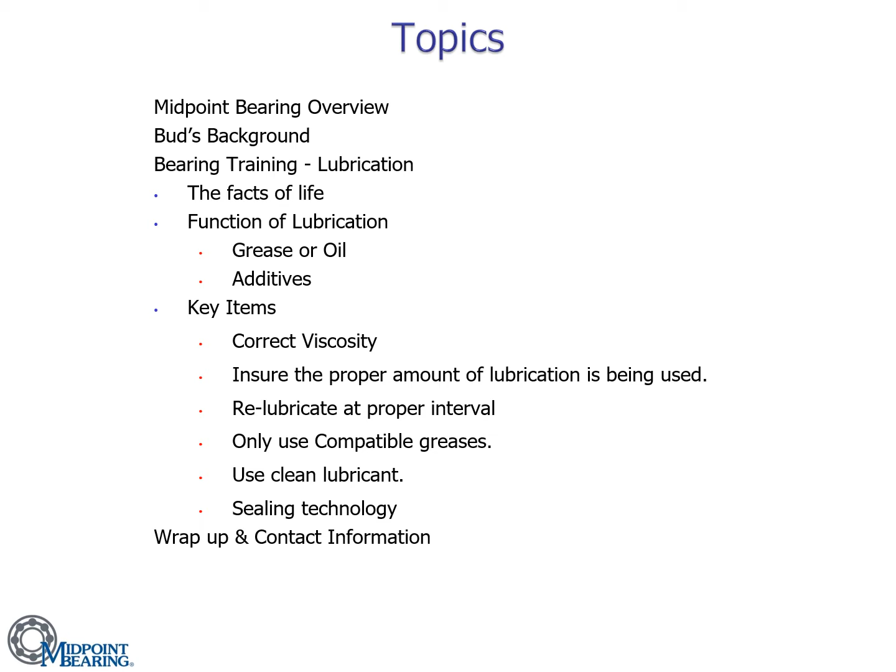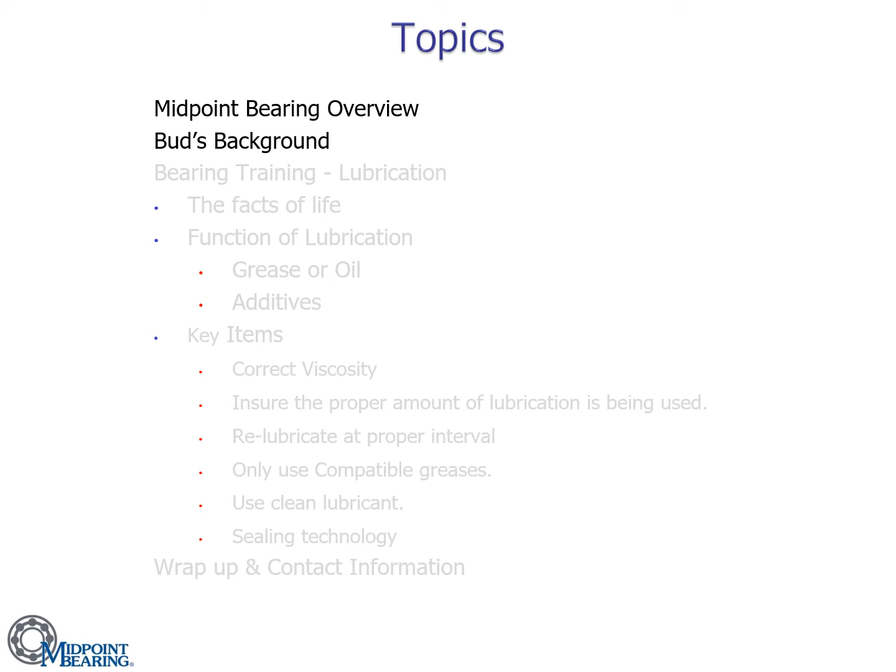So let's start with our Midpoint Bearing overview and Bud's background. Midpoint Bearing was established in 1985.

We are a distributor of bearings and power transmission products. We have 4 warehouse locations: California, Texas, Oklahoma, and Indiana. California is where our corporate headquarters is located.

Midpoint Bearing specializes in 4 major industries: wind turbine repair, electric motor repair industry, steel mill equipment, and the pump repair industry.

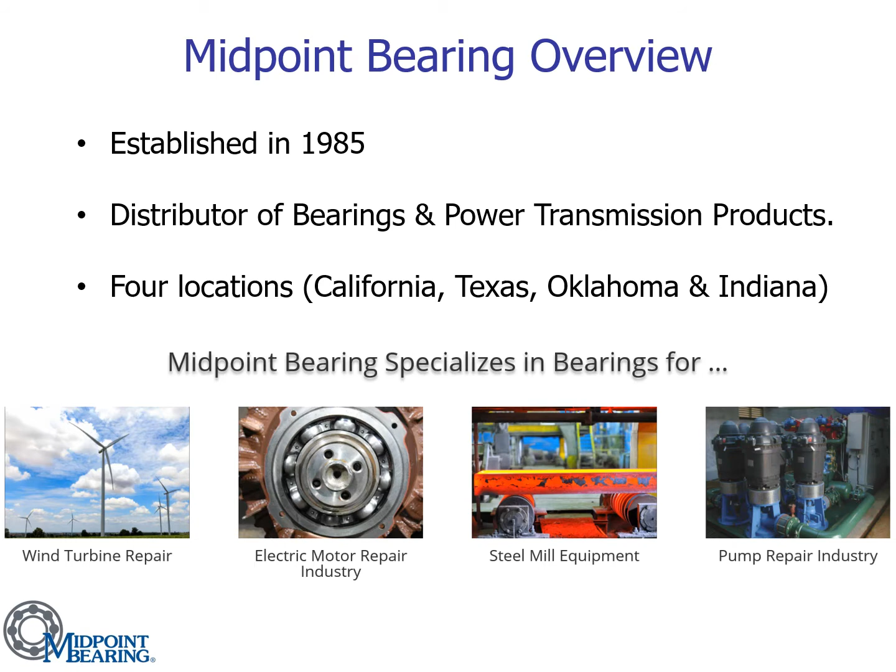Midpoint Bearing is a factory authorized distributor for many fine products, including SKF, Koyo, NTN, Schaeffler, Nachi, Timken, CR Seal, Aegis, Benchmark Thermal, and many more.

A little bit on my background. My name is Bud. When you have a name like William Charles Frable the Third, you want to go by something nice and short like Bud.

I'm from a small town called Napoleon, Ohio. I served for 5 years active duty in the U.S. Army. Then I became a steel rule die builder, did that for approximately 7 years. During the end of that time, I started schooling and finished my mechanical engineering degree from Cleveland State University. 13 years at Koyo Bearing in the engineering department, and in 2012 I was given the opportunity to work for Midpoint Bearing.

Our next topic is the beginning of our bearing training on lubrication, and the first section I titled The Facts of Life.

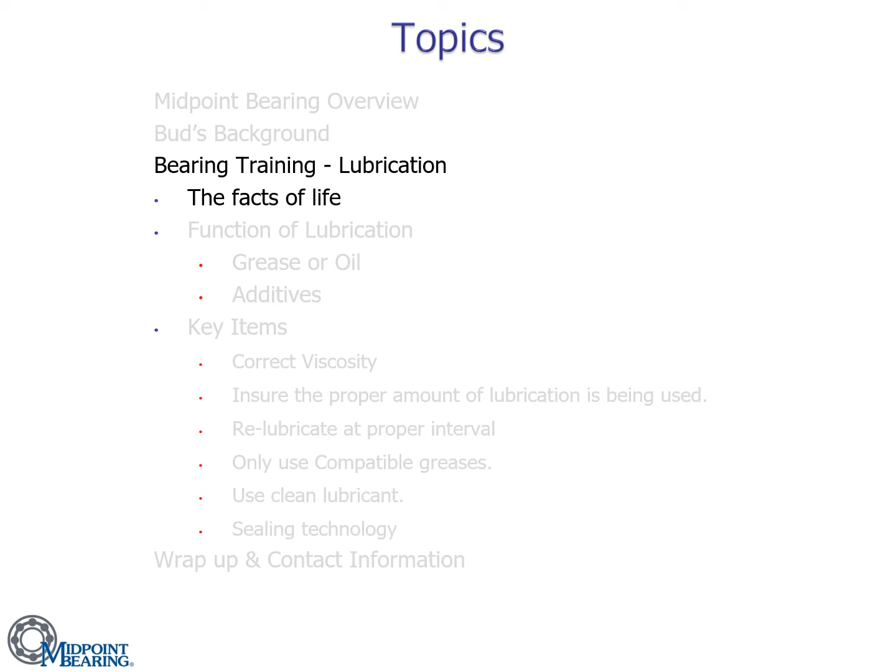Bearing lubrication. I'm going to start with the facts of life. Many times I've heard these questions: how long should a bearing last? That's a pretty loaded question, because how long a bearing should last is truly defined by its speed, its loads, and there's a lot of factors that go into how long a bearing should last.

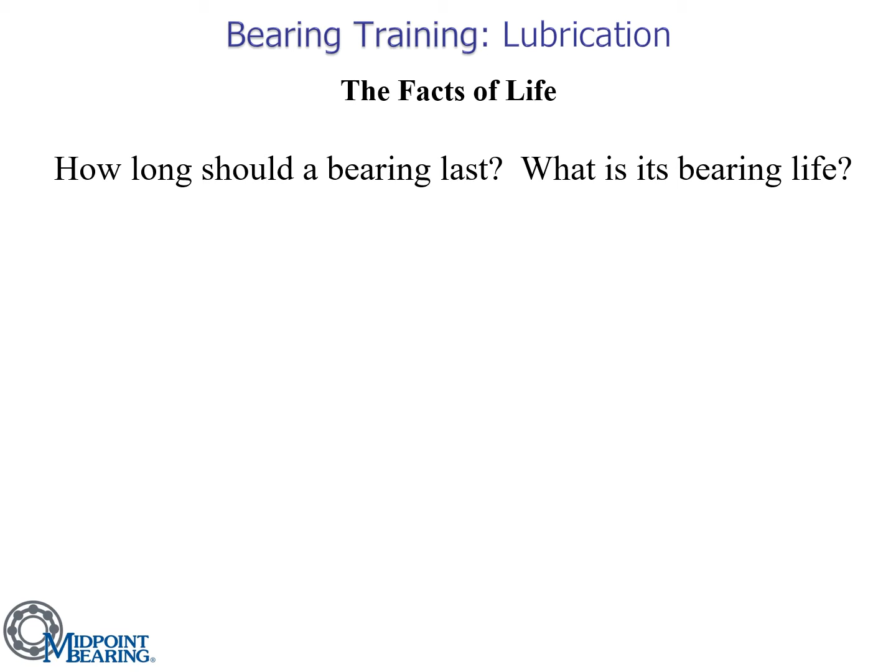And then you hear, well, what is bearing life? The expected bearing life is normally calculated by an equation called the L10 equation. It is virtually impossible to predict fatigue. So what they did years ago is they did a statistical variation of individual bearing lives. What that means is they studied hundreds, maybe thousands of bearings in the exact same scenario, and looked at their failure rates and used that to come up with this equation to best predict this fatigue.

Now, the issue with any statistical variation is that you always have a failure rate, and that's what our 10 stands for. So L10, that 10 is defining a failure rate of 10%. So 90% of bearings will achieve this number before fatigue failure.

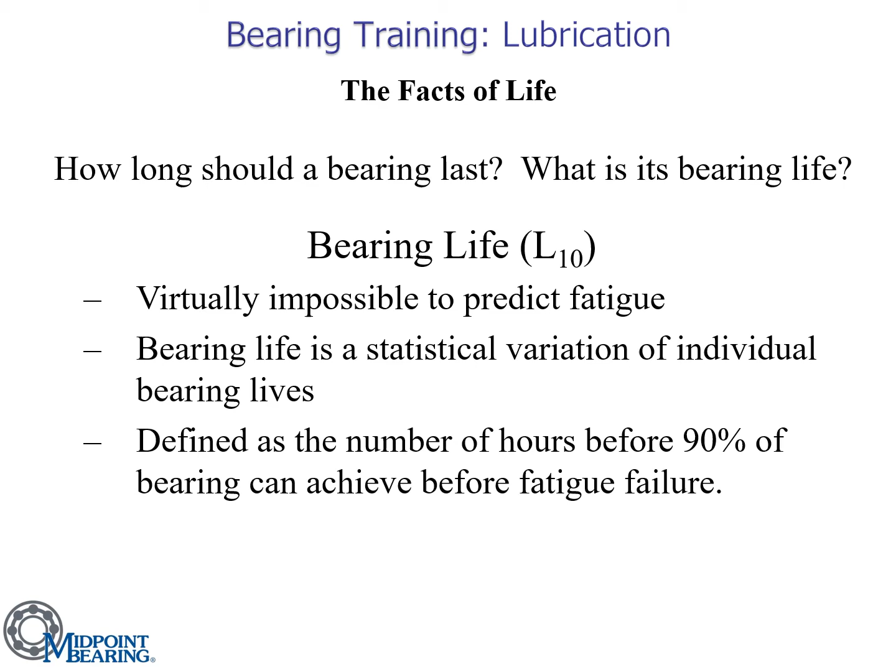Continuing on the facts of life, here is the standard L10 equation. To calculate your bearing L10 life, you have a constant of 10 to the 6th, a constant of 60 times N, which is your rotational speed, times C, which is your basic dynamic load rating, over P, which is your dynamic equivalent load rating, raised to the power of little p, which is 3 for ball bearings or 10/3 for roller bearings.

To calculate this P, you need this combined load equation, which is basically looking at, based on the application, how much of your radial and how much of your axial load will apply to your bearing life. And that creates your P, which goes there. And then when you have multiple bearings in a system, you use this equation here that combines all your different life calculations together to calculate a system life.

Now, notice anything interesting about all these different life equations? Do you see lubrication anywhere? I bet you don't. Lubrication is kind of important, and that's why we're in this training today.

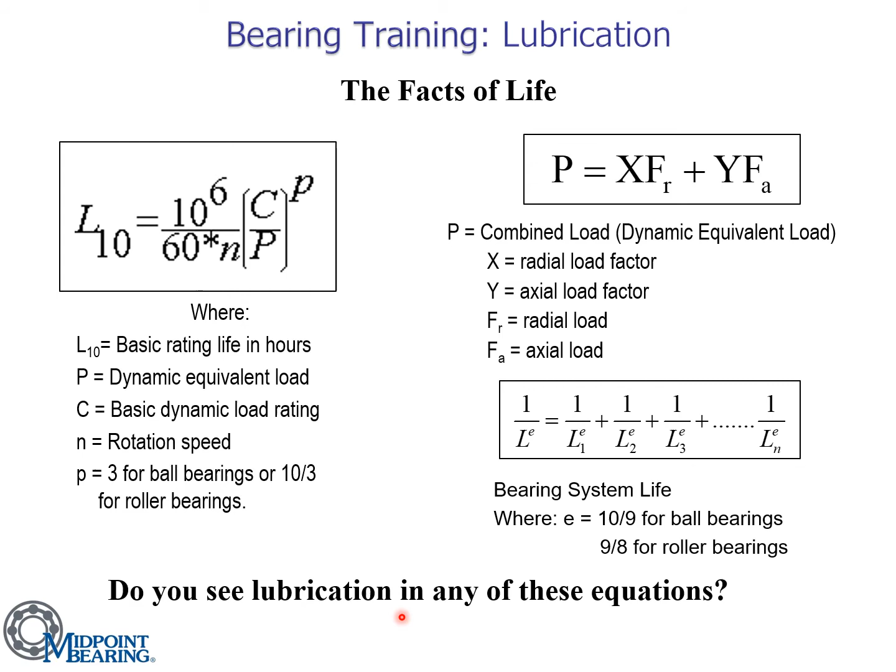The thing that is difficult in the aftermarket is a lot of this deeper information that is required is not available.

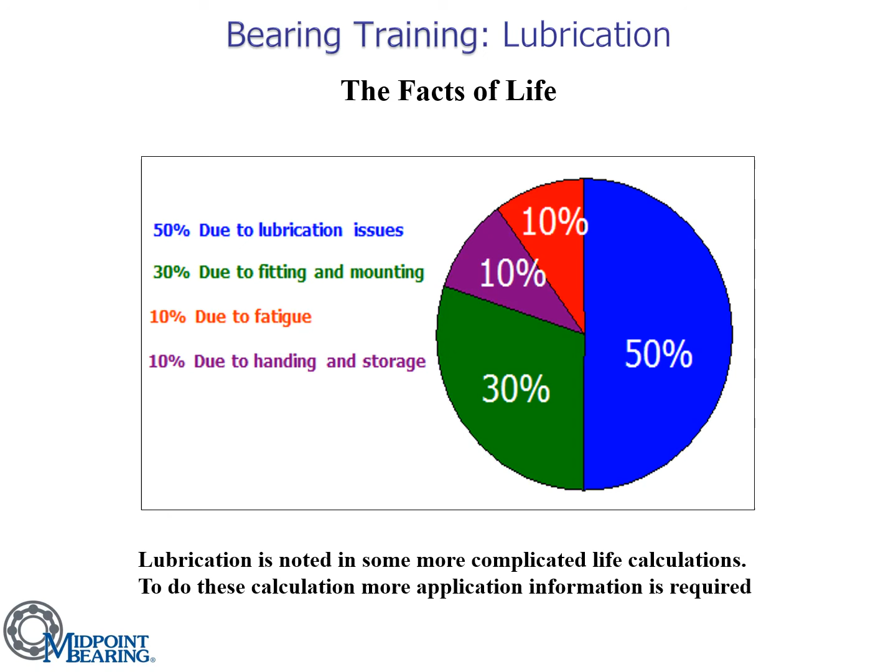Our next section we'll discuss is functions of lubrication. Within this section, I discuss grease or oil, and I also discuss additives.

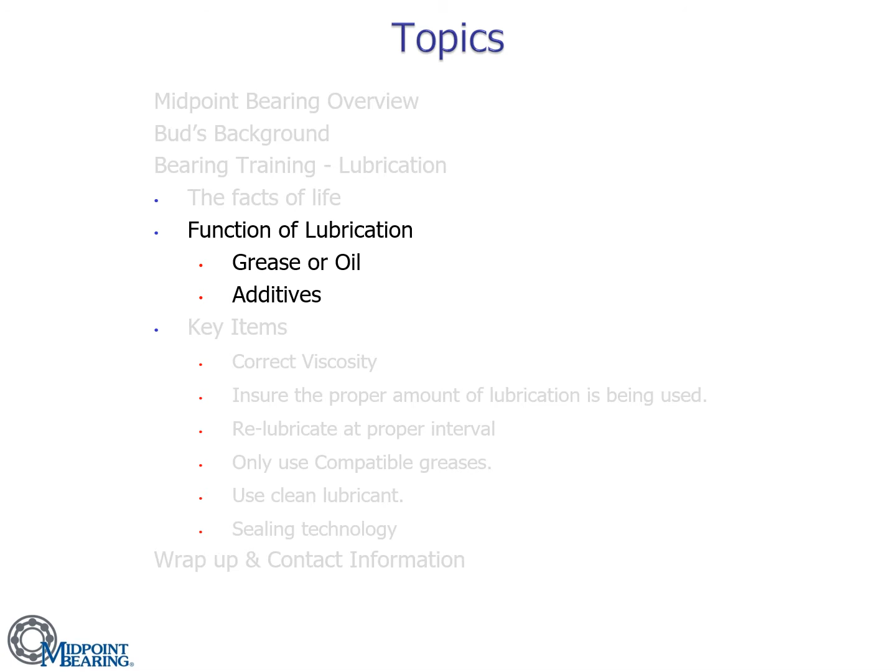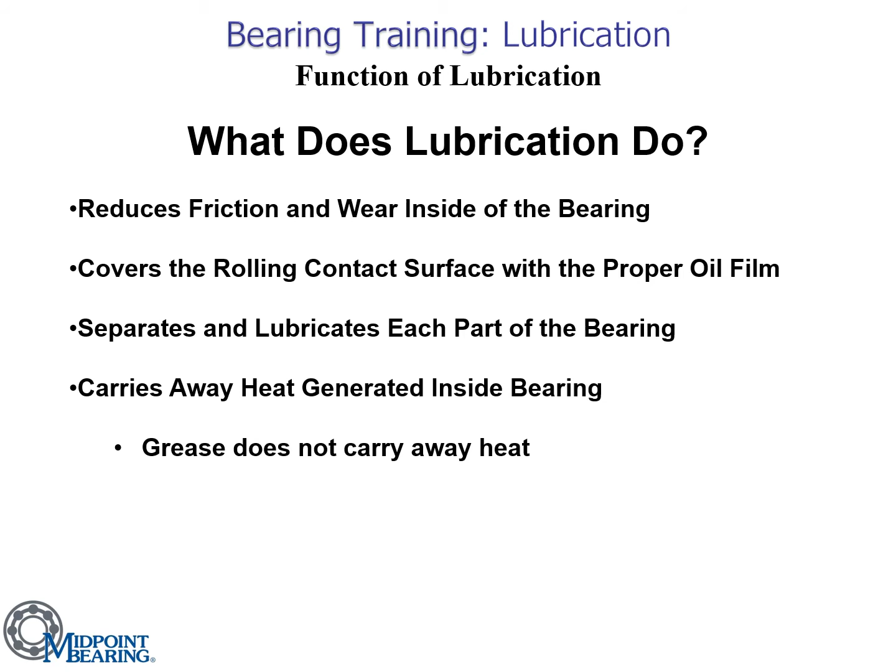What does lubrication do? Lubrication reduces the friction and wear inside the bearing. It covers the rolling contact surfaces, that's the rolling element and the raceway surfaces, with the proper oil film. It separates and lubricates each part of the bearing. It carries away heat generated inside the bearing. Important note: grease stabilizes heat, oil can remove it. The carry away part is only done with oil. It also prevents corrosion and contamination.

This is not a new idea. It's been around for a long time. The picture we see below is estimated to be from around 2000 BC. It is thought to be the first record of rolling motion, found on some palace wall I won't try to pronounce. But what we see here is a large rock being moved across the ground, with rollers being thrown underneath it to help it roll and reduce sliding friction. Now, I may be right or wrong, but these guys here look like they're carrying a jug, which could be oil or grease, that they could be using to soak the rollers or the ground in front to help reduce friction as they try to move this big rock.

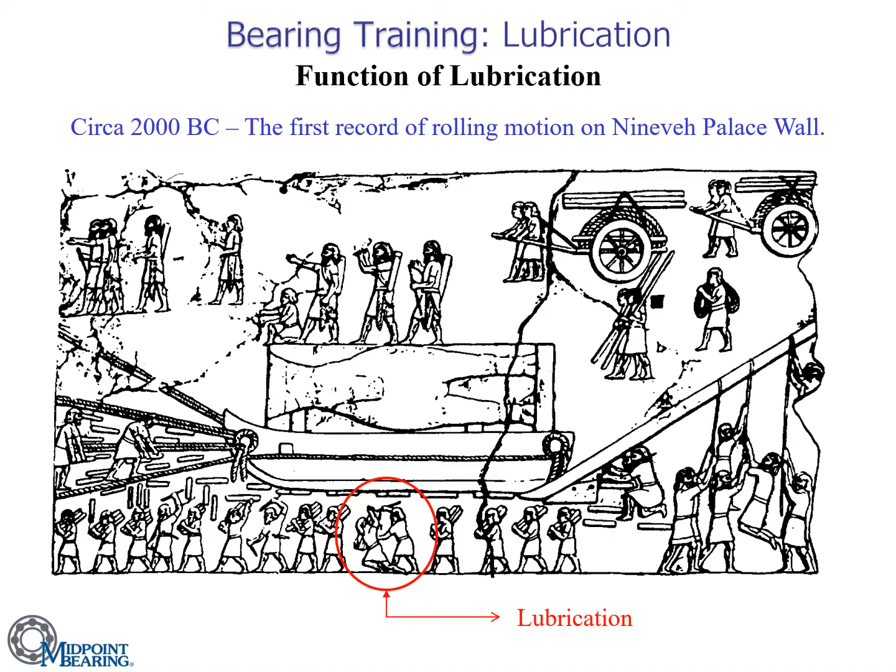Many times I get the question, what is better, grease or oil? It really depends on your application and what capabilities you have within that application. On this slide, I like to highlight 7 different items that can be looked at and split up as good or bad. If you graded them, sealing device shows grease is easy and oil is complicated. All the rest, lubrication ability, rotational speed, replacement of lubrication, life of the lubricant, cooling effect, and filtration of dirt, the oil seems to win. So you'd think, why don't we use oil all the time? The reason is mainly this top one: sealing the lubricant is the most difficult aspect. If you can't seal that oil, if you can't keep it cool without a circulatory system, grease becomes the easy option and wins out.

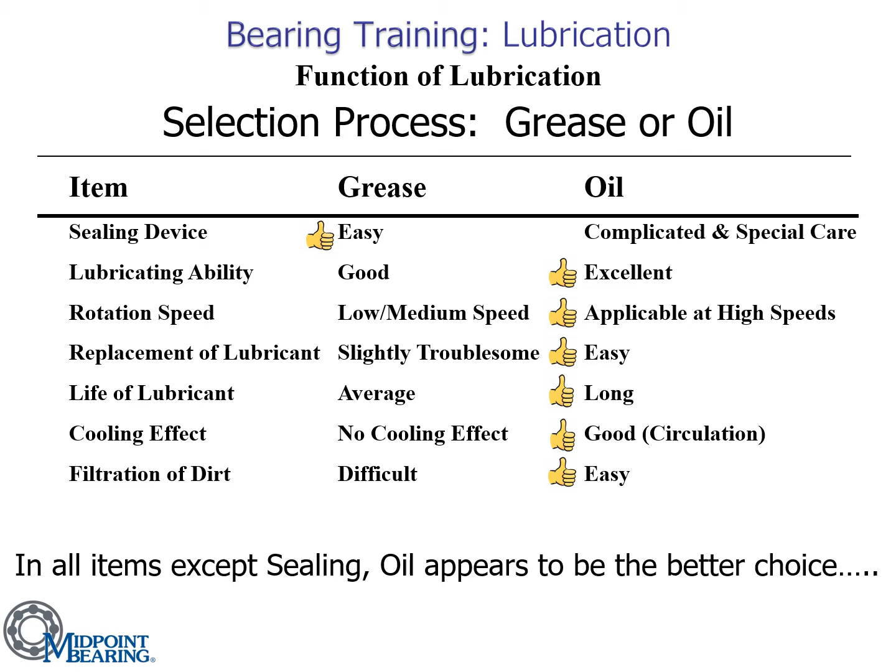This slide might be a little redundant compared to the previous one, but it breaks down oil lubrication in more depth instead of grease. The first bullet says it's usable at high speeds, because grease has a thickener and is a thicker lubrication. At high speeds, grease may get flung out of the bearing or away from the rolling elements and raceway. Oil is also usable at high temperatures, because you can circulate oil and control its temperature using some form of chilling system. You can control the amount better in an oil system, which allows you to reduce bearing vibration. The next comment I thought was kind of silly, but I like it anyway: oil lubrication is mainly used when grease lubrication cannot be utilized. Oh, glad you brought that up, right? Quite interesting.

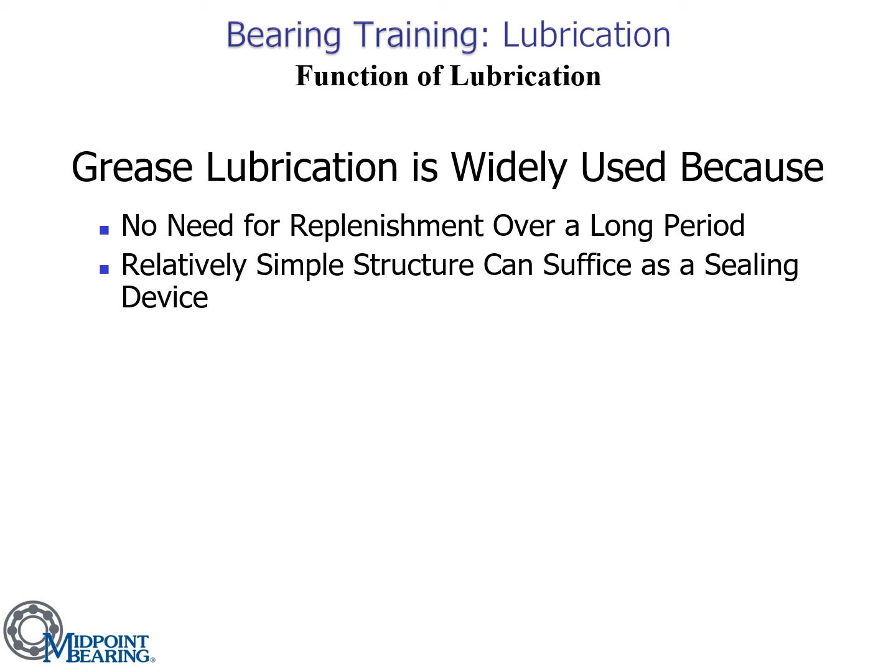That leads us into the next section, which covers two methods of grease lubrication. Closed, meaning it has a seal or a shield bearing, comes with an advanced amount of fill from the factory, so they come factory lubed, normally 25 to 45% fill. We'll discuss that a little bit later. Or you have a feeding method, such as a bearing in a housing with a grease zerk, where grease is pumped into the bearing from an outside source.

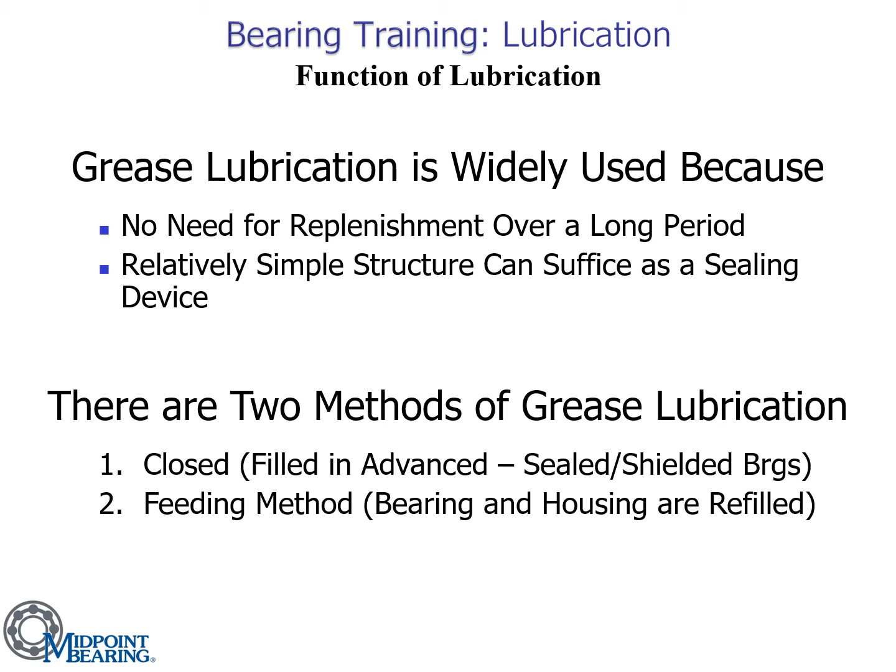What makes up a grease or an oil? Both grease and oil start with a base lubricant or base oil, and then you add additives. A few of them I noted here are antioxidants, rust inhibitors, an additive for a stronger film, stabilizers, and anti-foaming agents. The difference between grease and oil is that grease also has a thickener, which makes up a very high percentage of your grease.

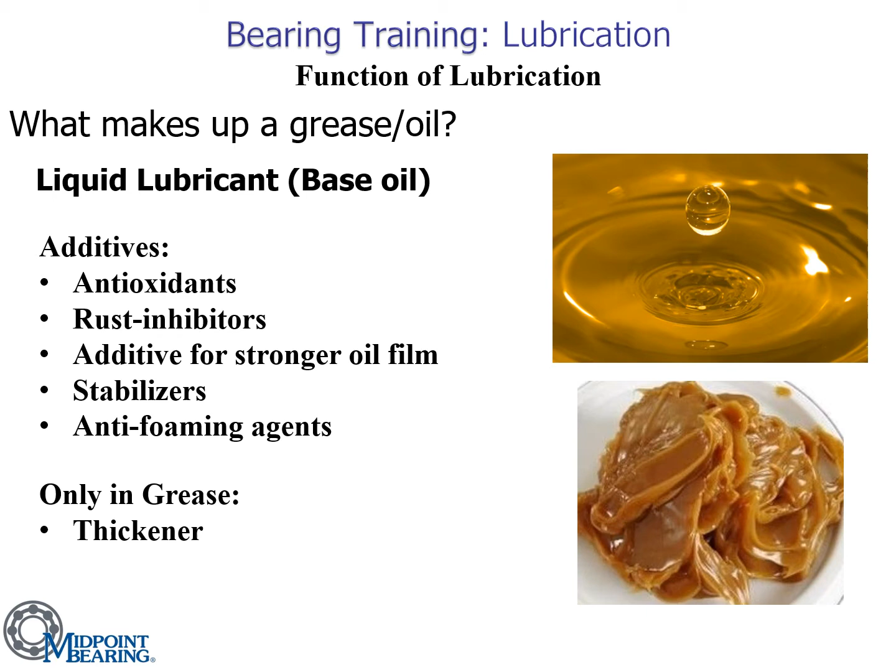Why do you need additives? I use this slide to define what these different additives do. Antioxidant stops the gumming up of grease or oil. I don't know your ages, but if you ever had the first generation of oil or fuel injectors for your car, they'd always get gummed up and people would complain about their gas, so you'd add an antioxidant to help keep that system clean.

Rust inhibitors are fairly easy to understand - they stop rust. Additive for stronger oil film is to reduce wear. Stabilizers are used to prevent a change in state - not moving from one state to another like going from Ohio to West Virginia or Kentucky, but changing from a solid to a liquid to a gas. We don't want our oils or greases to go from liquid into gaseous form because it won't do its job. The next one is anti-foaming agents - again pretty easy to understand, that's to keep the formation of foam in your system.

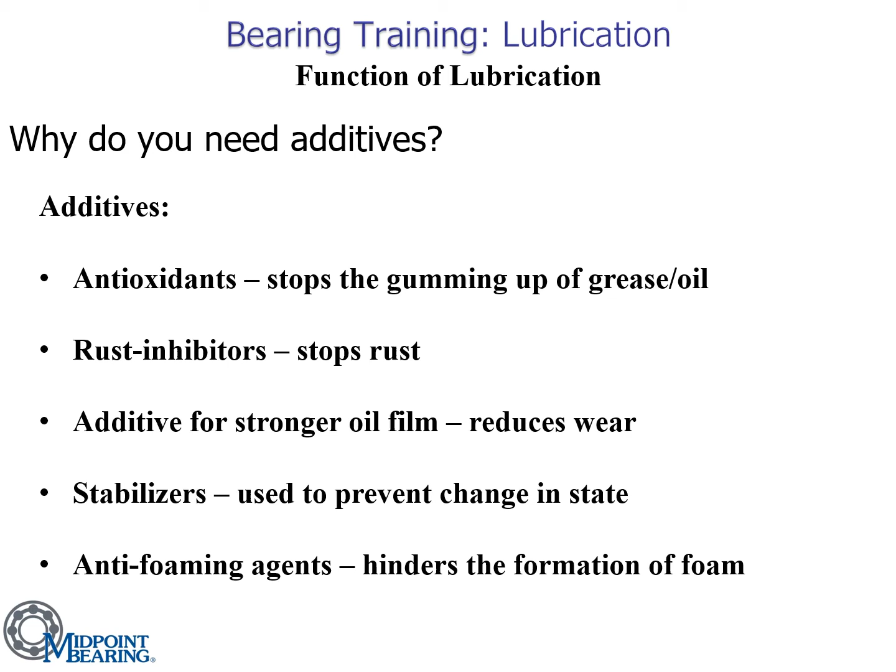This slide shows the properties of a few common greases. The first one here, Alvania number 2 - when I was working for a bearing manufacturer years ago, Alvania number 2 was very common in the industrial OE, original equipment division. At that point, over 20 years ago, electric motors came in with multiple different types of grease. Two of the common ones were a Multemp SRL and a Chevron SRI number 2.

Today, Polyrex EM is the standard in the U.S. electric motor repair market. Here's your Polyrex. The reason for this was a study done by Baldor that showed Polyrex EM outlasted all the other greases. This, in turn, had all the major bearing manufacturers switch their aftermarket product to Polyrex EM.

In my opinion, there are two major important parts to this. Number one is the temperature range. Although I've seen the Polyrex temperature range differ from chart to chart, the -10 to 170 on this particular chart shows a very large temperature range. The low end may not be as low as your SRL, but it does overlap all of the other greases.

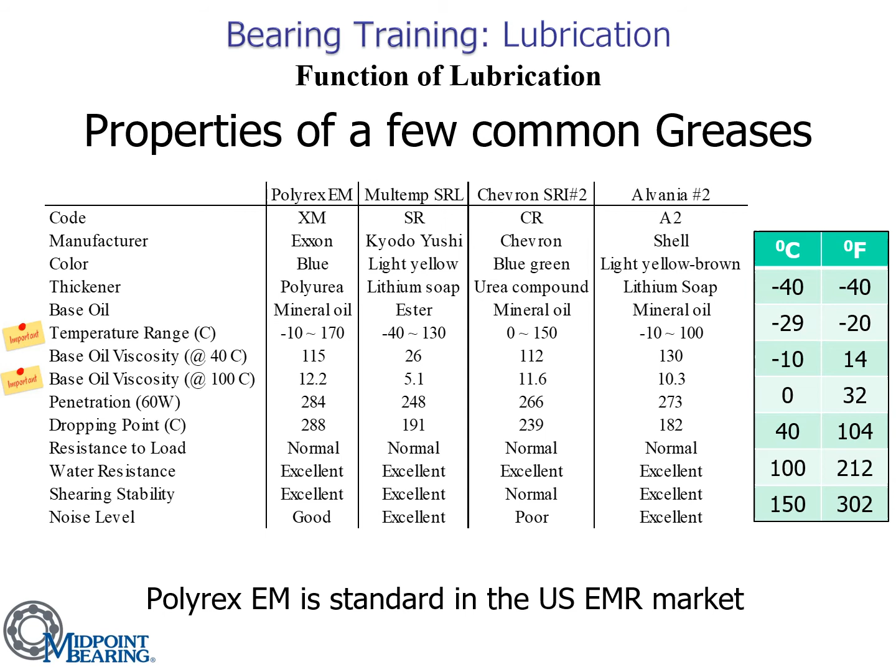Many times in failure analysis, I hear people talk about the bearing just catching on fire, and knowing that the temperatures it would take to burn steel are extremely high, I figured I'd look into the temperatures that would cause a lubrication to catch on fire. To best do this, I felt I needed to define a few key items.

First is a flash point - this is the lowest temperature at which it can vaporize to form an ignitable mixture in air. But the key is this must have an ignition source. Auto ignition is the temperature where ignition occurs without a source - it's also called a fire point. So that's where it just bursts into flames.

Flash points less than 60.5 C or 140.9 Fahrenheit are considered flammable. I've seen that number different on different places on the internet, but I'm just going to run with that.

Now, looking at our greases - Mobil Polyrex EM has a flash point. Again, flash point means it needs a source, a spark, to cause a fire. It does not go to fire until 204 degrees Celsius or 400 degrees Fahrenheit. Chevron SRI: 260 degrees Celsius or 500 Fahrenheit before it will ignite with an ignition source.

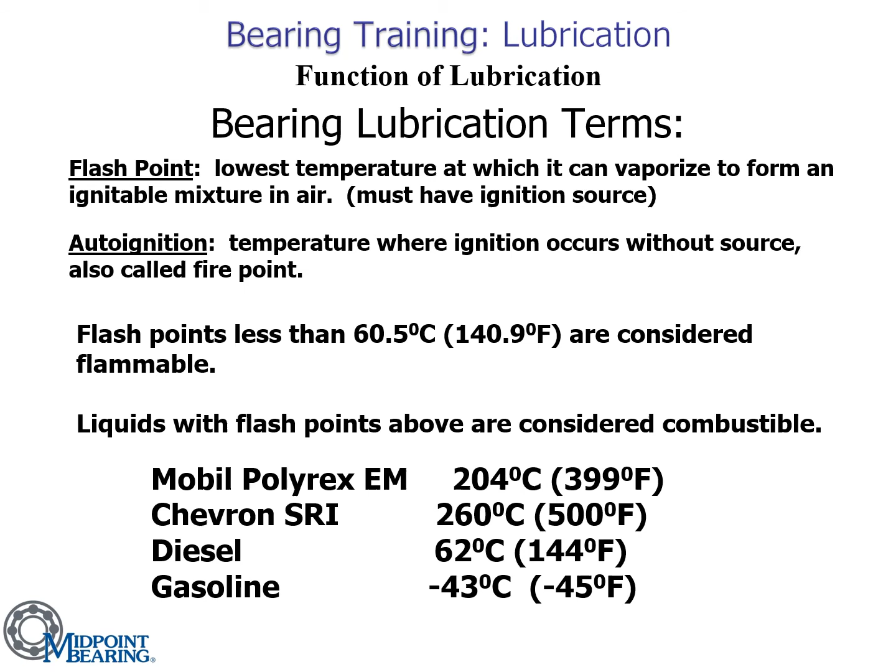Our next section will be an item I called key items. Within key items, I will look at the correct viscosity, ensure we have the proper amount of lubrication being used, re-lubricate at proper intervals, only use compatible greases, use clean lubricant, and sealing technology.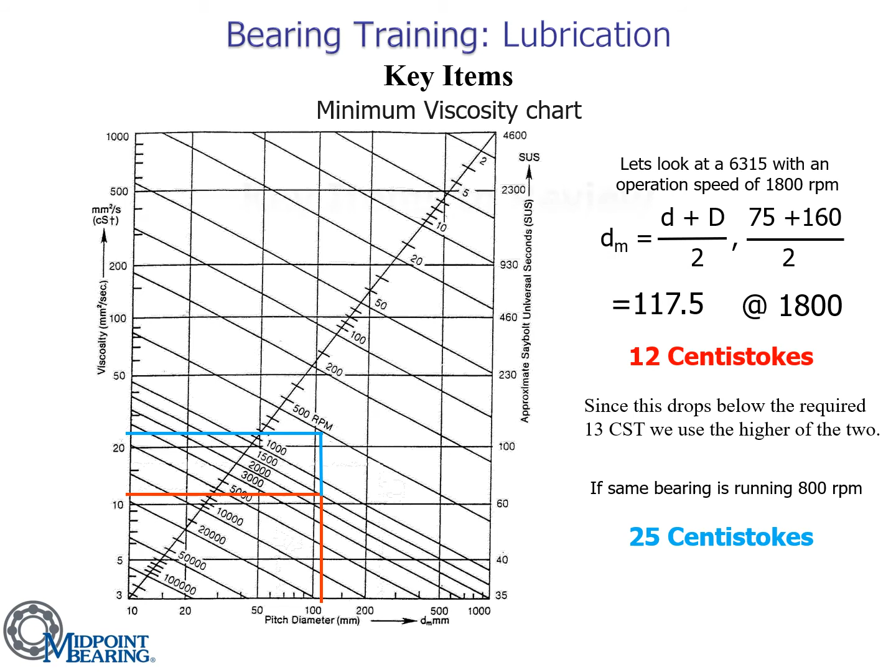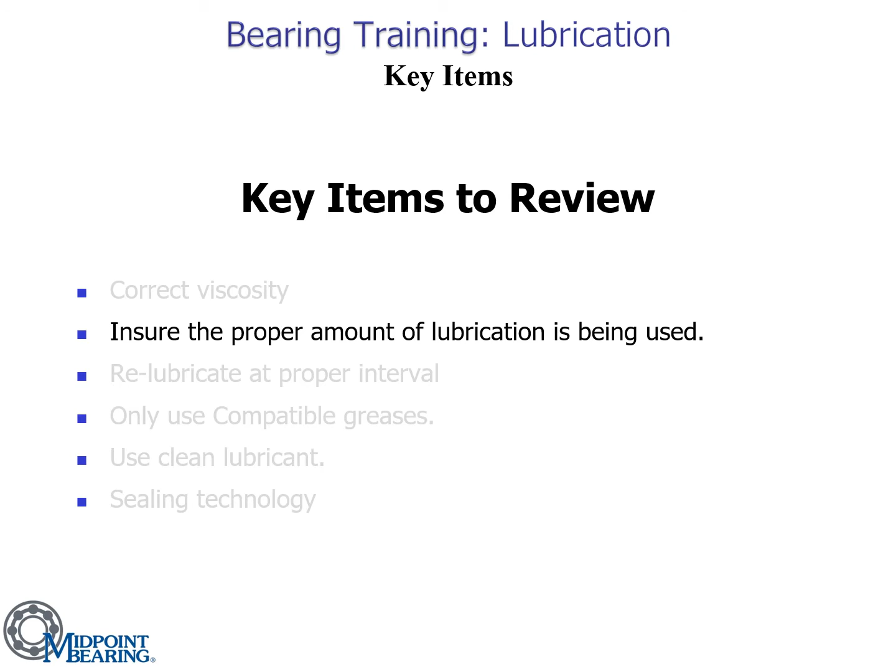Our next topic under key items is going to be ensure the proper amount of lubrication is being used. This number varies a little bit from manufacturer to manufacturer, but most bearing manufacturers fill their sealed and shielded bearings with approximately a 25 to 45% fill.

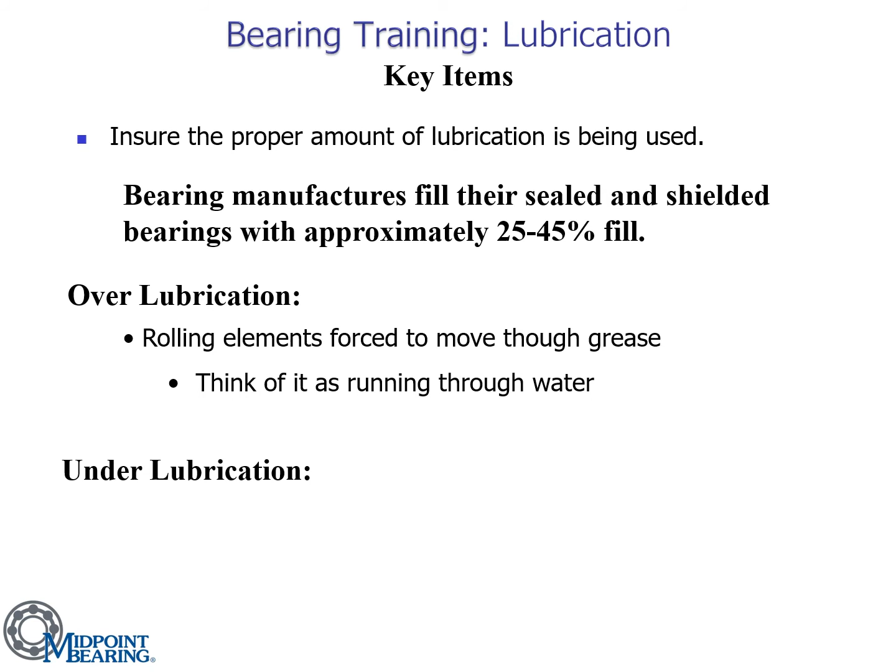Over lubrication can cause problems in your bearings because you have to review it simply as your rolling element is being forced to move through that grease. A lot of people go, but it's grease. It should make it nice and easy to move. But I like to try to think of it as running through water. If you're running on a beach somewhere and the water level is at your ankles, it's fairly easy to keep your speed and the amount of energy that is being exerted to run through this water. Now imagine if you were trying to maintain that same speed and all of a sudden the water was up to your neck. That is what you're doing to the rolling element inside of the bearing. So the easy way for me is to think of it as running through water, and what does that do? It creates heat generation. Under lubrication,

What it does is it does not allow there to be the correct film barrier between the rolling element and the raceway surface. This causes metal to metal contact, which increases friction, which does what? It creates excessive heat generation.

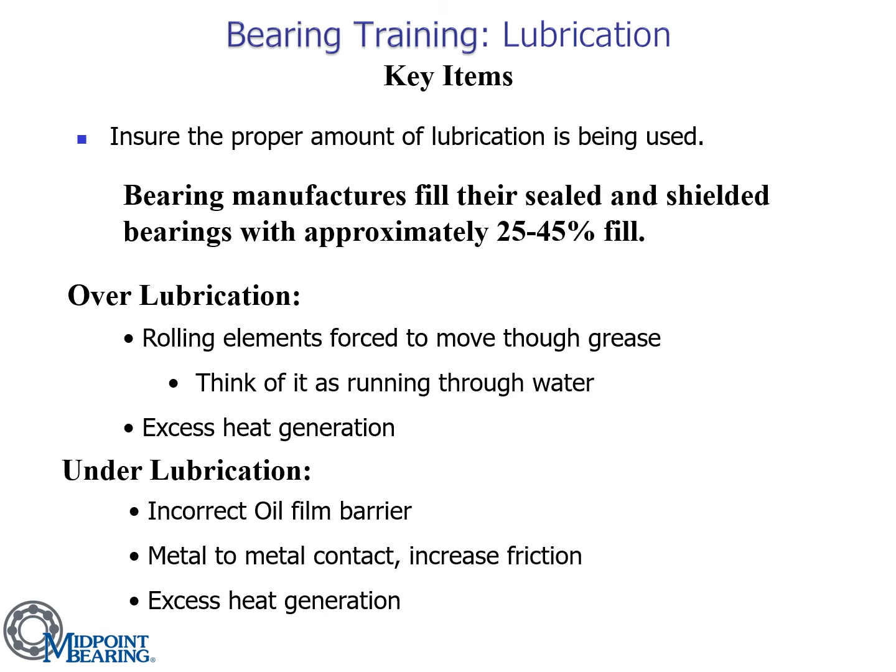This leads us to that big question that is always hanging out there: which is worse, lack of lubrication or too much lubrication? Kind of a loaded question. They're both pretty bad, so we're going to take a little time and look at both.

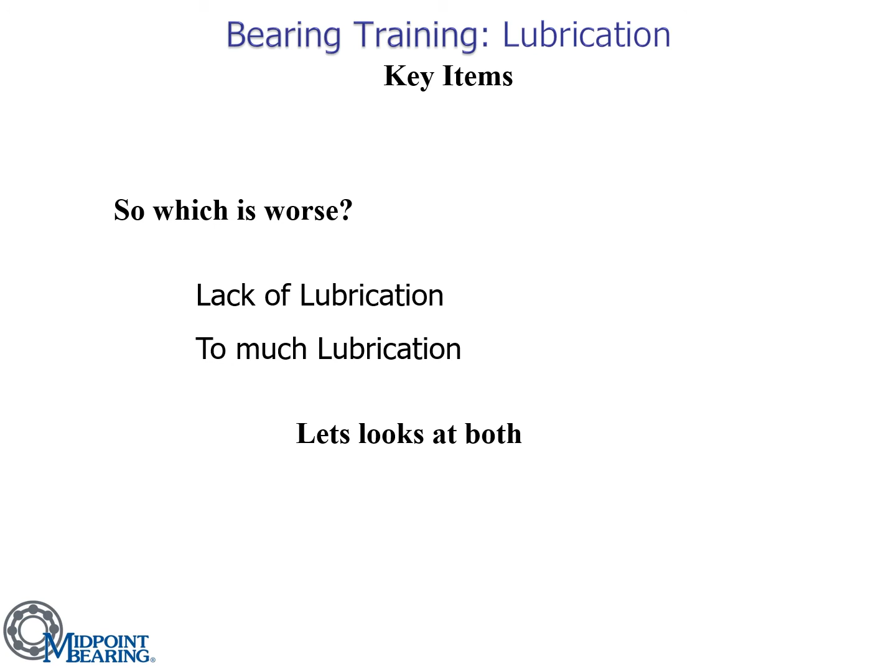This goes back quite a few years now, but it's still relevant today. Back in my bearing manufacturing days, where I worked for a manufacturer, we took a 6207 C3 bearing and loaded it up with 3,500 pounds of thrust load, or axial load. We set an operating speed at 4,000 RPMs. These numbers may seem high. The objective was not to overload the bearing and give it more than it's supposed to be able to take, but I wanted my test to not have to last 3 years. I was hoping to complete a test in a few days. The other thing we did to this bearing is we washed it clean. There was no grease, no oil, no rust preventative, totally dry bearing.

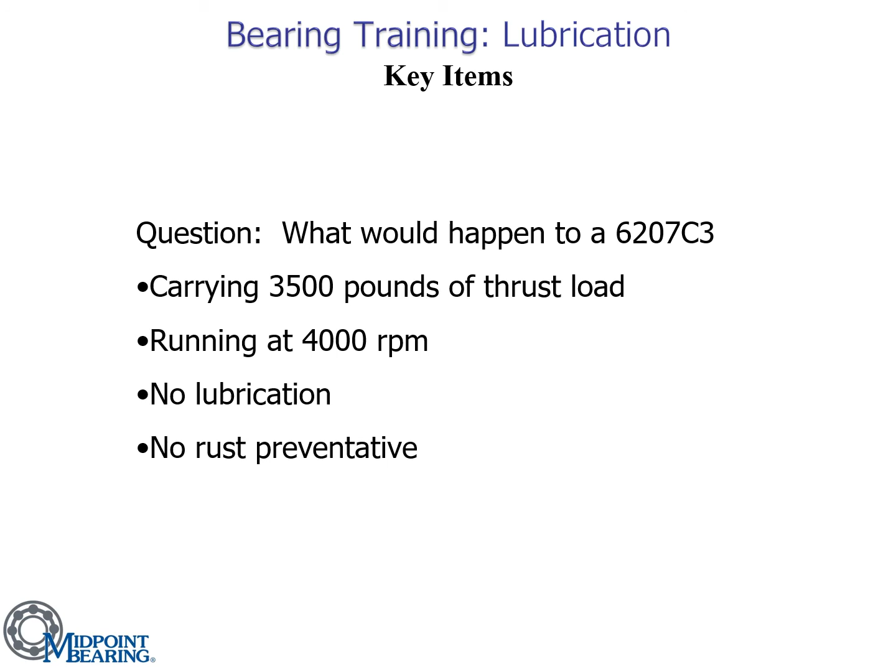Now I had to test it. What you see in front of you is the test rig, and I will play you a video. I did have to shorten it because I can't keep you for an extended length of time, but we'll see what happens.

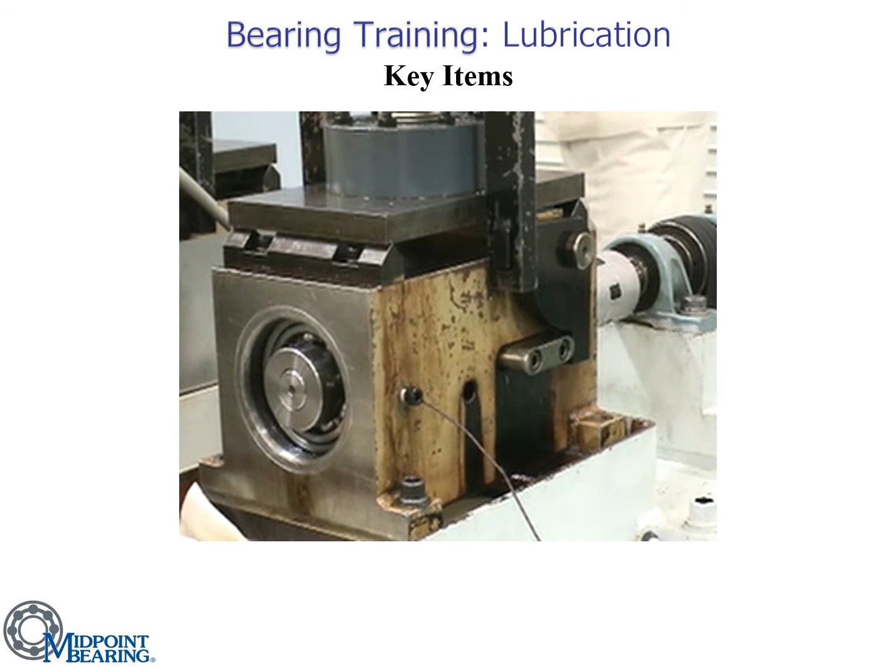So I know a lot of you just met me and you probably don't want to call me a liar, but go ahead, write down on a piece of paper how long you think that lasted. Go ahead, write it down. Little test versus you and your buddy, we'll see who gets the closest. How long do you think this bearing lasted? By the book, it was 8 hours.

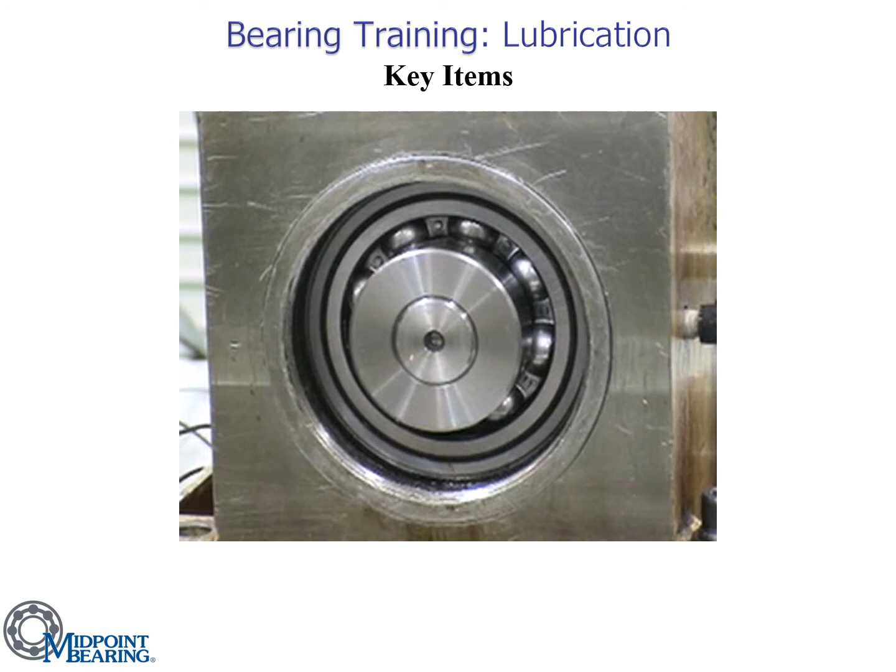If anyone guessed 15 minutes, you hit the nail on the head. 15 minutes is only 3% of calculated life. I know I didn't mention this earlier, but this life equation, this L10 equation, is extremely accurate, even though it's so basic. We've seen bearings last 3 to 5 times longer than L10. It's a great indicator that a bearing will last this much or longer. 3% of calculated life, that's kind of hard to wrap your mind around. But when you look at the life equation, it doesn't consider grease or temperature. It assumes that you're taking all those factors into consideration.

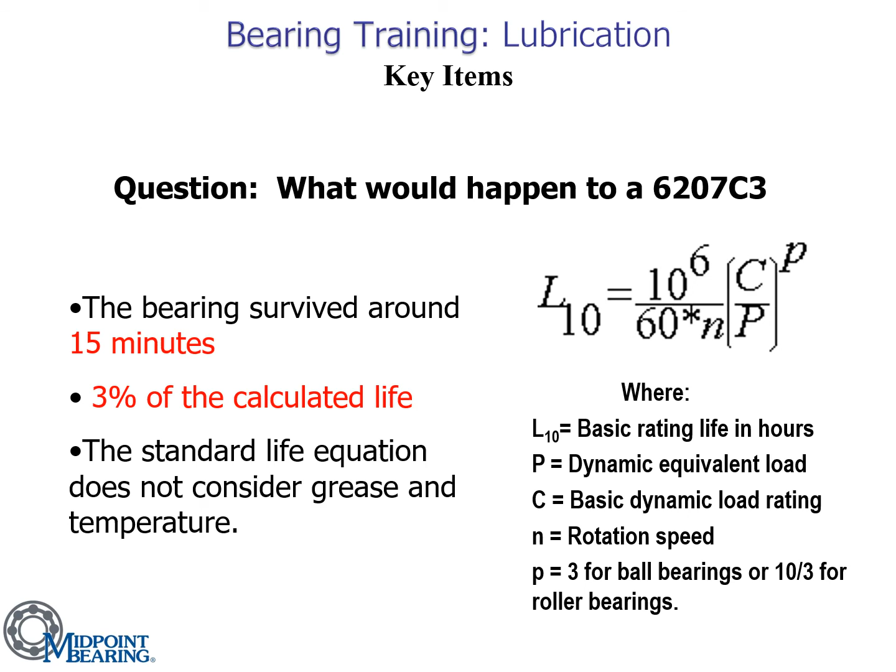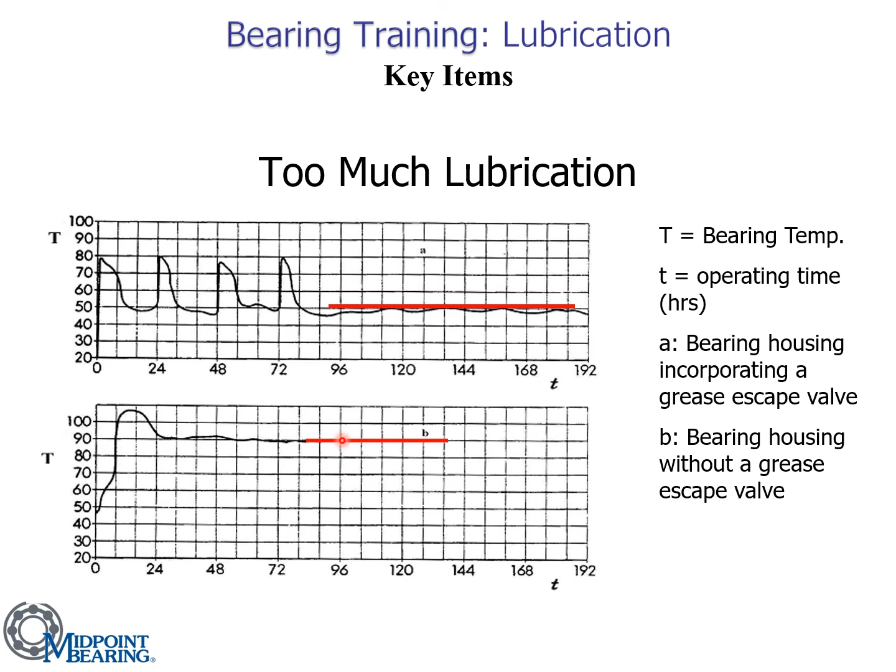I know I mentioned this a few slides back, but it's so very important: why is too much lubrication a problem? Think about it as running through water. When water's to your ankles, it's very easy to keep up your speed, but if it's up to your neck, it's very hard to maintain your speed. What this does is create excessive heat generation.

How long should we leave the grease valve open after we re-grease is a difficult question, because I can't give you an exact time — it depends on the size of your motor. The simple answer is until the grease stops flowing. You'll remove that escape valve, pump your new grease in, the bearing will automatically push away what it doesn't want, allowing grease to move out. Once it stops moving, you want to close the grease valve.

Now, everybody likes rules of thumb. Well, how long should that take? Again, it depends on the size of the motor, but in most cases we see about 20 to 30 minutes.

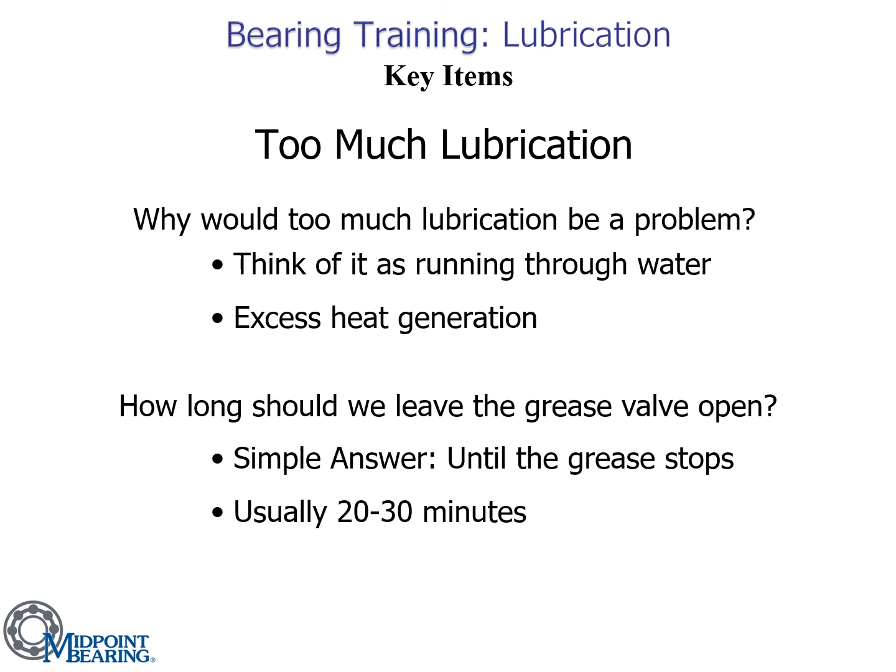The other question that comes up is, well, when should we re-grease? I always like to say, well, Friday after lunch... no, just kidding. Actually, you want to do it while the piece of machinery is either running, if you can do it safely, or warm.

The reason for that is if you do it when it's cold, your grease is going to be thick, and when you pump in your new grease, it will actually channel through the old grease and find its way to the escape valve and out — so you're not pushing the old grease out. You want that old grease to be thinner, hot, so when you push the new grease in, it will push out or purge out the old grease.

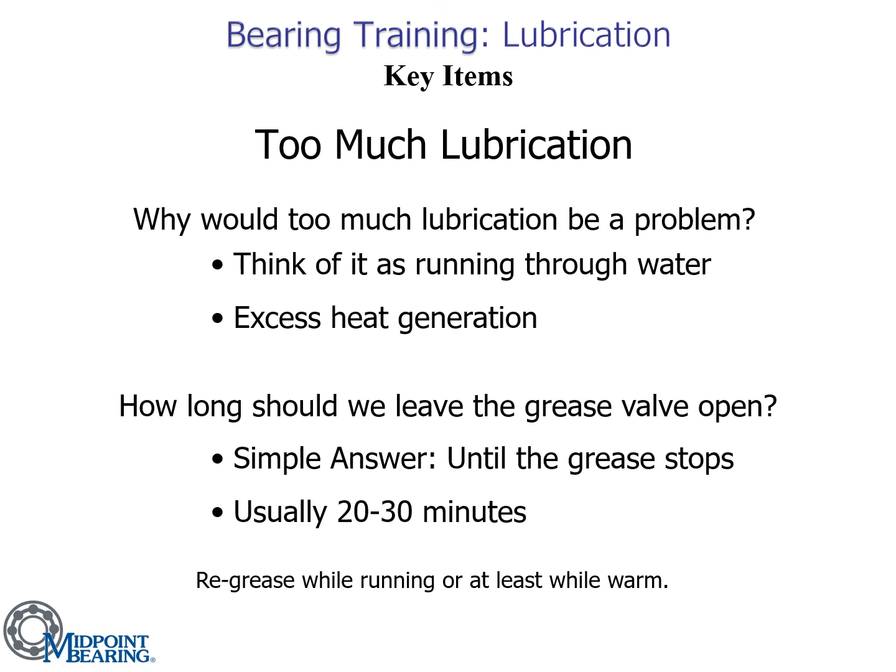Motors run on an air gap, and that air gap helps with the efficiency of the motor. In these cases, I think that grease might be affecting the air gap just a little. How does this happen? This happens when somebody has a grease gun and goes a little bit crazy — confusion over how much grease goes into this motor. Some people might say it takes 2 or 3 pumps of the grease gun, and people think, oh, you meant 2 or 3 tubes. Well, it happens quite often.

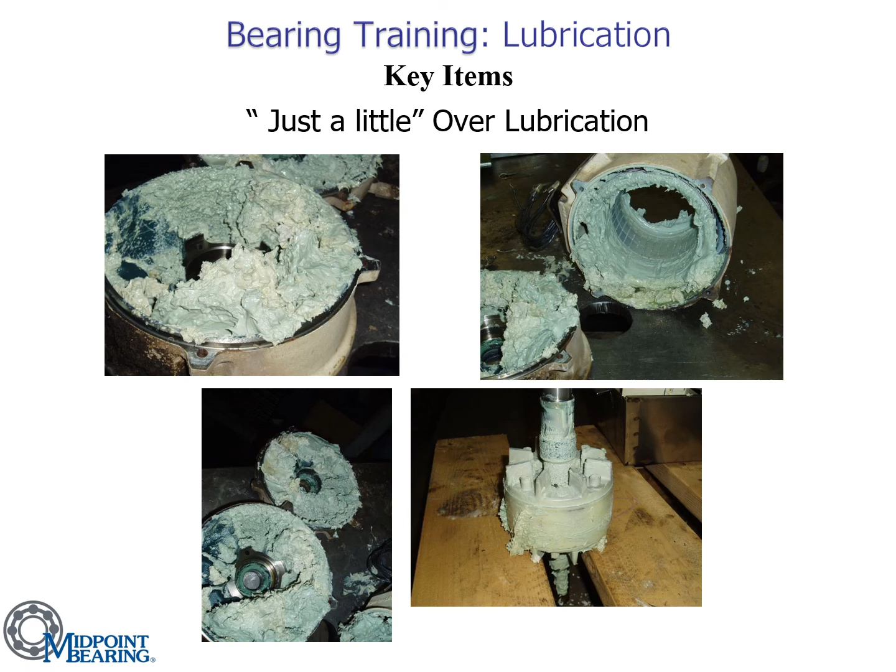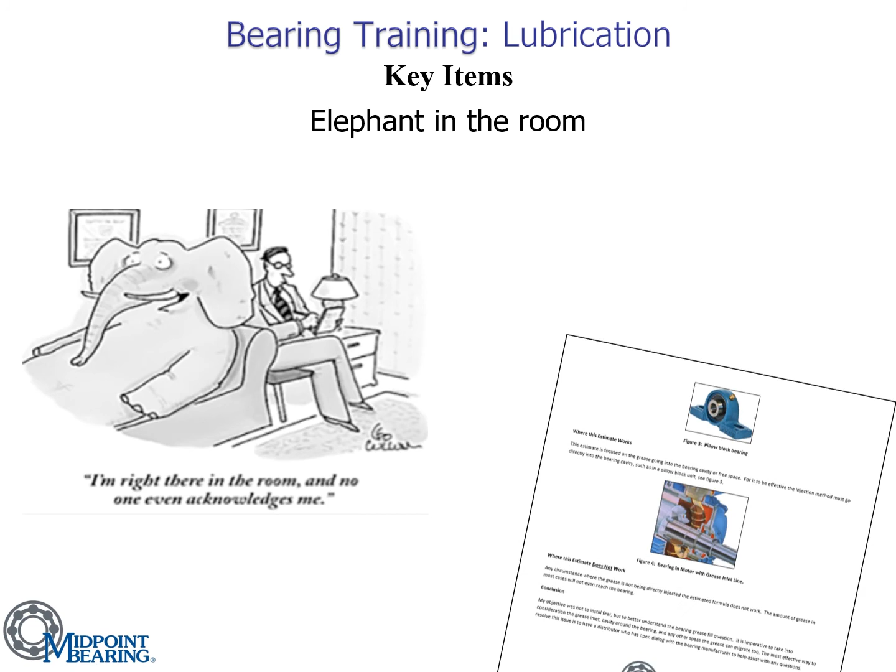The elephant in the room is obviously, well, how much grease do we put in the bearing? This is a difficult question to answer because it depends on the size of your bearing. The data plate that you see on the side of a lot of motors will specify the amount of grams that should be added to each bearing. Now, how that is calculated is this equation that's on the bottom.

Well, these calculations can only calculate the free space, or the space inside of the bearing. So that number, those grams they show on that data plate, is for the grease to be directly injected into the bearing. It is virtually impossible for a bearing engineer to calculate from your grease zerk through your inlet tube to your cavity and then into the bearing how much grease you need. We can only do our calculation on the bearing only.

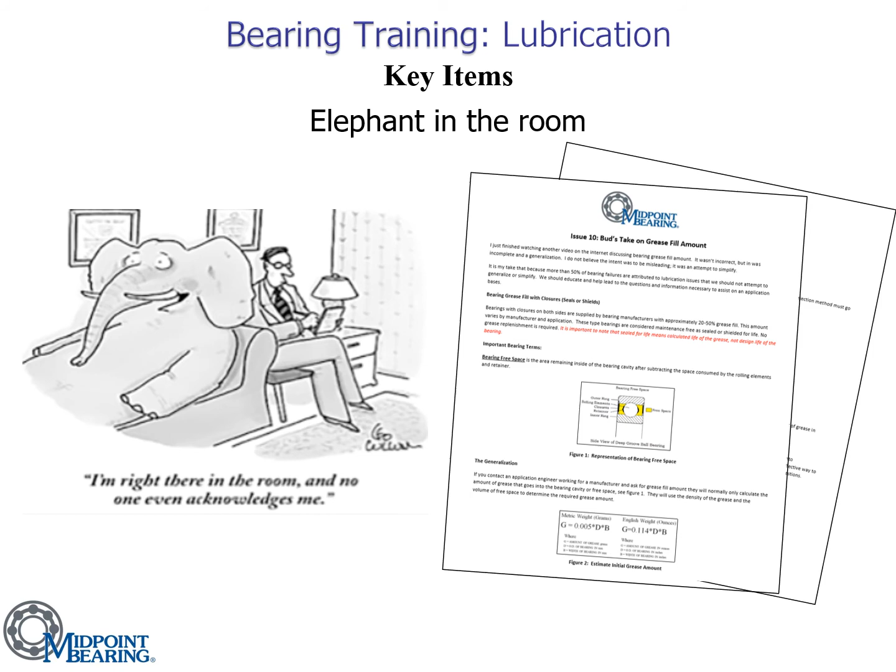Our next topic will be the relubrication interval.

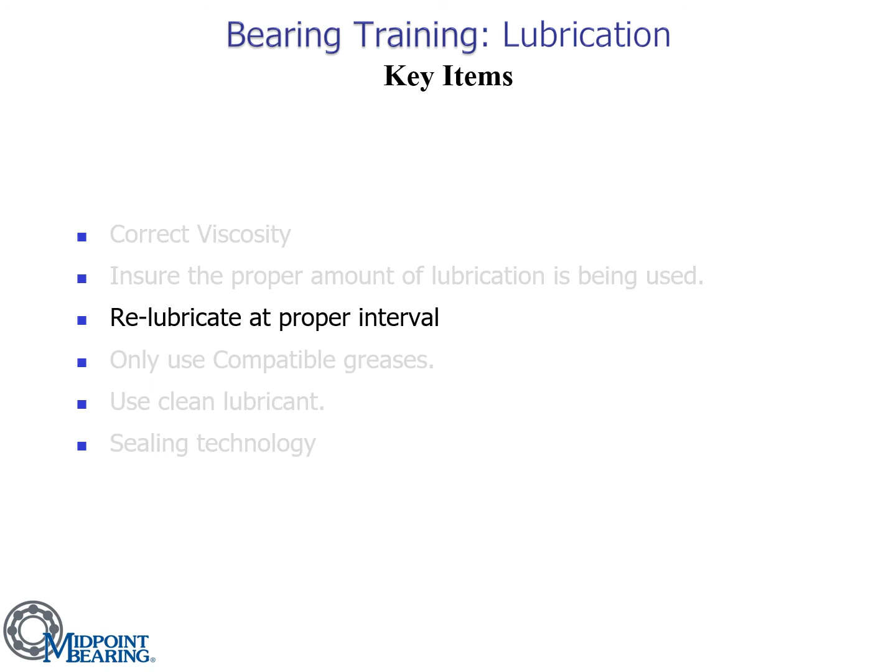A little bearing basics here for you: the 6 designates that this is a deep groove ball bearing, which is an A, a radial ball bearing. The 2 is the duty series of the bearing — that's the ratio of the OD and the width. And the 10 at the end, you multiply by 5 for your bore. So 10 times 5 is a 50 millimeter bore.

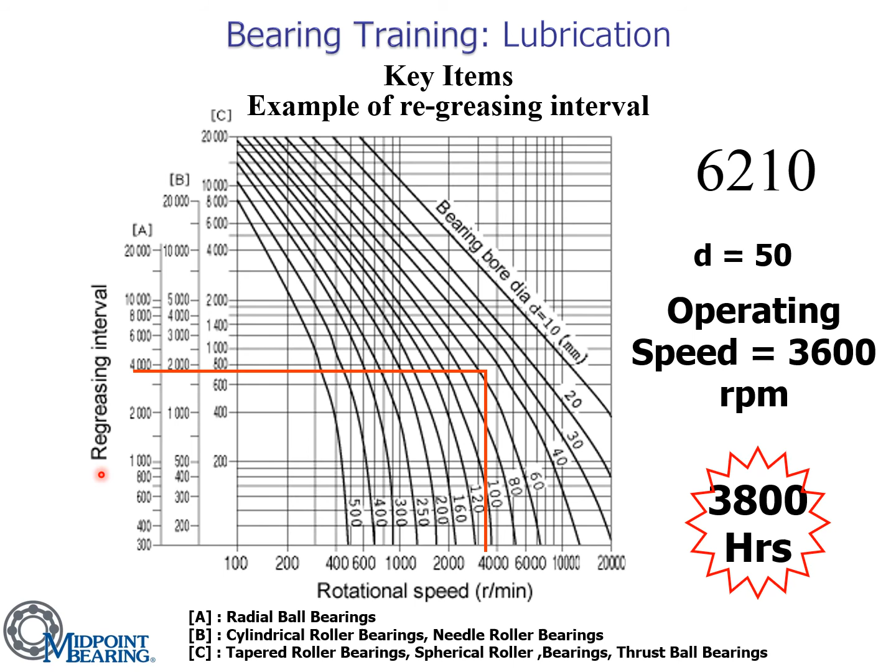The chart we previously looked at is focusing on motors running or equipment running under 160 degrees Fahrenheit or 70 degrees Celsius. Once you go above that temperature, your grease life is shortened.

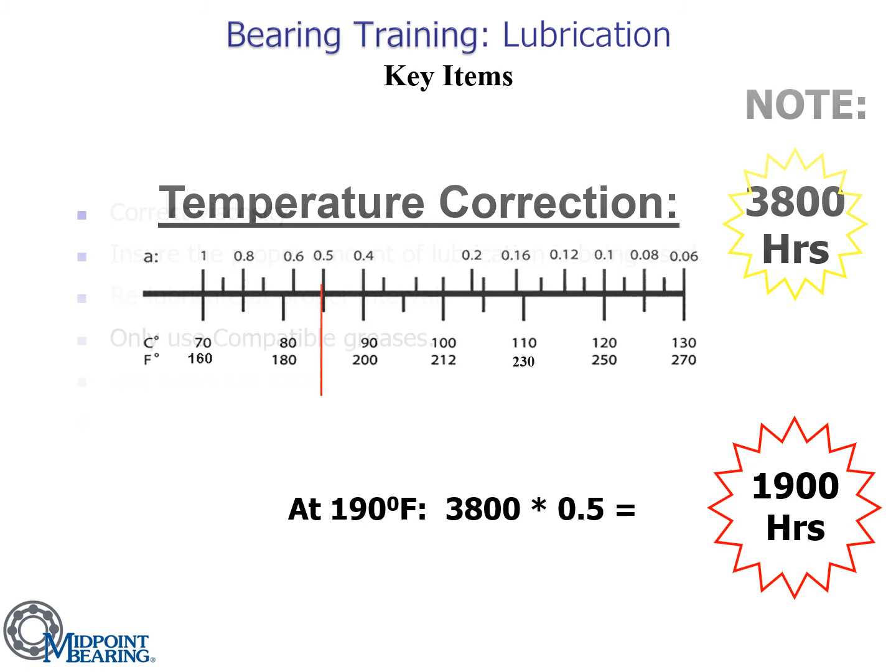Our next topic is only use compatible greases.

My soapbox stance is don't mix grease if you don't have to. It's just not worth it. Regardless of what any of these charts say, there's not enough background information. Just don't mix grease. Problem solved.

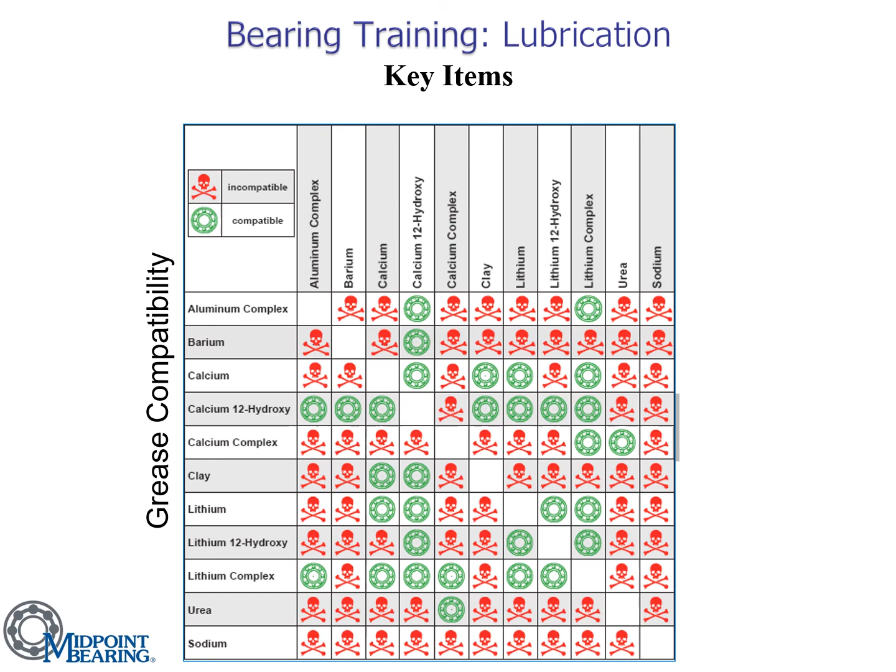I don't know. You got a quarter? Let's flip it and try to find out. Not a good scenario to be in. One of these is incorrect.

Now, if you run into a circumstance like this where you're unsure which grease is in the motor, the difficult part is, if it's a sealed or shielded bearing, it will have Polyrex. All of the major bearing manufacturers use that as their standard aftermarket grease. So if you don't know what you have in there, how do you fix that? Well, it might cost you a little bit of grease, but that's a much better price than paying a warranty repair on a burned up motor due to mixing of greases.

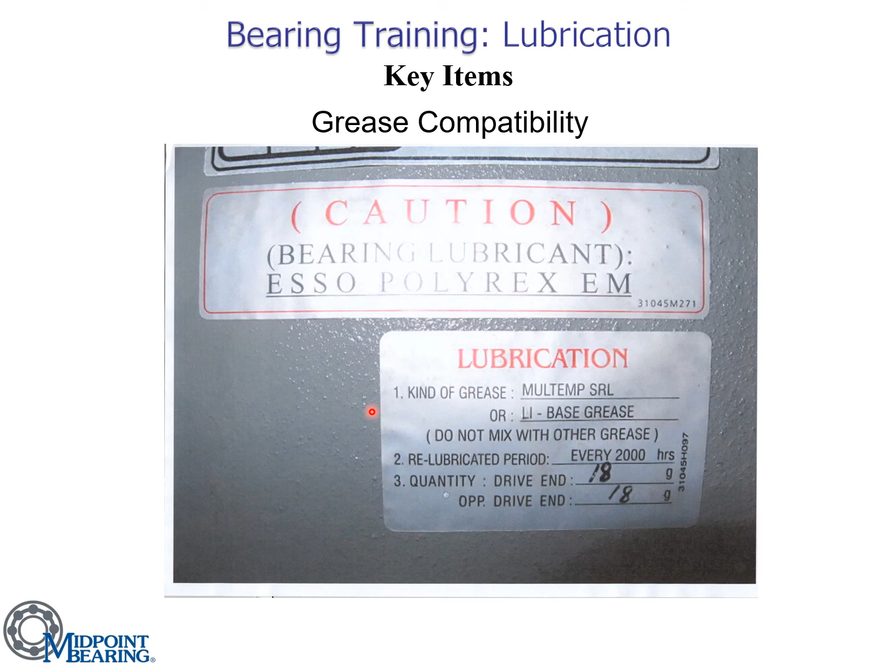Not a guaranteed 100%, but it's better than any scenario where you have mixed lubrication.

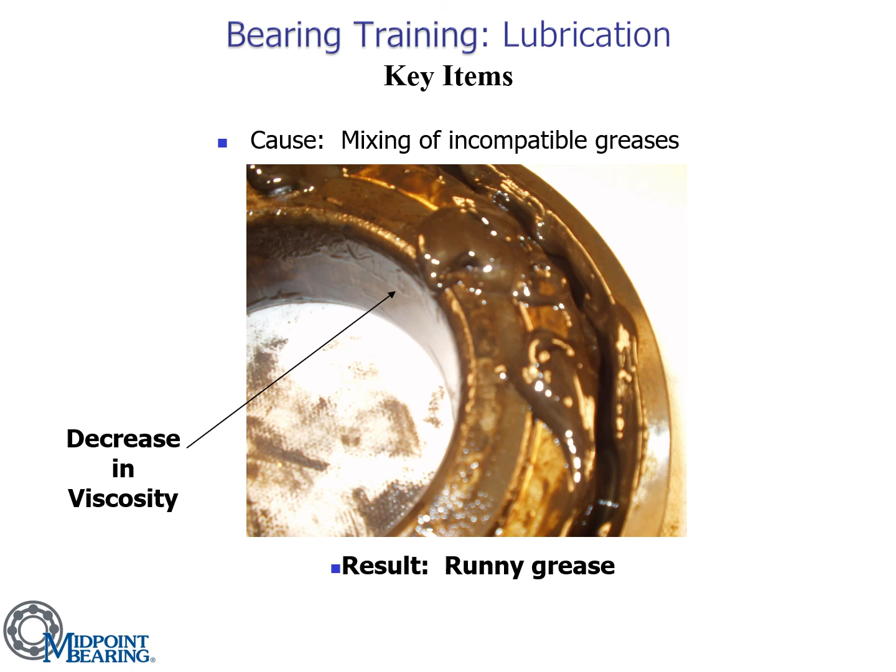The next section is use clean lubricant. This one's pretty cut and dry. We want to make sure our lubrication is clean. The last thing you want to do is throw dirty, contaminated lubrication into your super expensive piece of equipment.

Some of the little items that can be done on the service side would be making sure that the zerk fitting is clean before adding your new lubrication, and ensuring that the nozzle or tip of your grease gun is clean, just in case there's dirt packed into the nozzle head. I always recommend pumping a little bit of grease out of the gun and wiping it away, just in case the head has compacted lubrication or contamination in it.

Another thing I like to tell people to do is use one gun per type of lubrication. So you're going to take your grease gun and note this grease gun is used for grease A, and that grease gun will always be used for grease A.

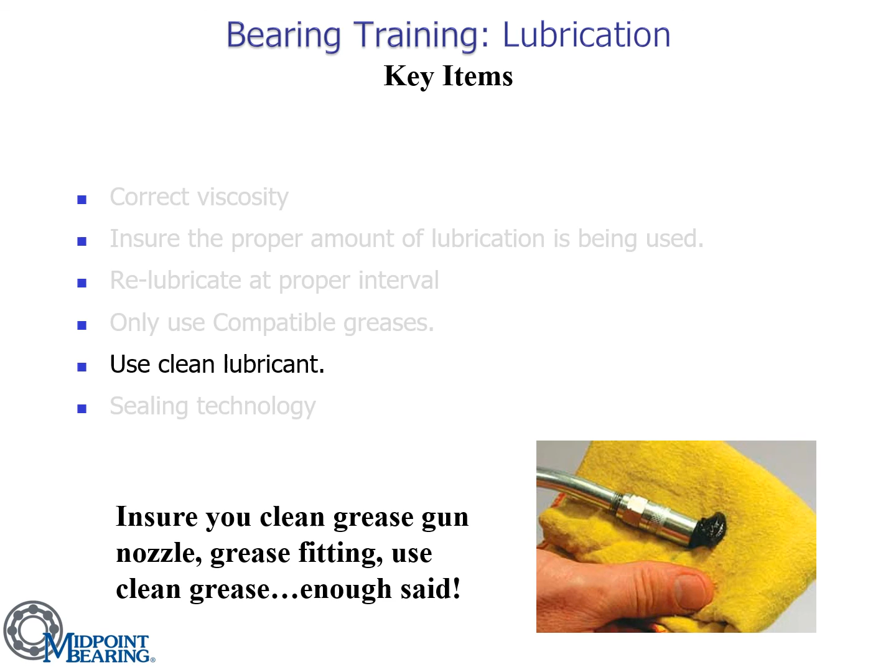Another small item, more related to over-lubrication, is to understand how much grease comes out of your gun for one full stroke. It helps to measure it by weight, so you have a good idea that one pump of this gun gives you, say, 15 grams. This makes it a lot easier to calculate and understand how much grease you're pumping into the bearing.

Our last section of key items is sealing technology. The image here is a bearing with a pressed steel shield, commonly referred to as a Z. If it's on both sides, it's a ZZ or 2Z. This changes from manufacturer to manufacturer, but it is a pressed steel shield.

Now, the shield does not contact the inner ring. There is a gap between the edge of the shield and the inner ring landing. This gap is small, and it's actually gotten more controlled over the years, but when we're dealing with contamination, a lot of particles are at the micron level and can still find their way through this gap, regardless of how tiny it is. That's another reason why the use of clean lubricant is so extremely important.

Today, sealed bearings, which I'll show you on the next slide, have improved to where their efficiency or speed capabilities are very close to the shield, which does not have contact.

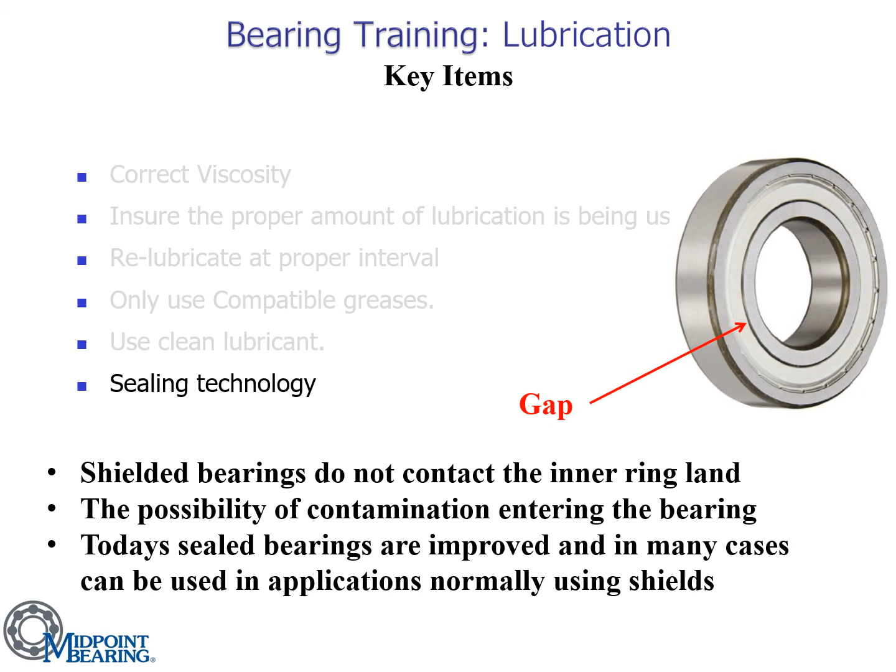In the electric motor industry, although we consider our speeds high, in the bearing world electric motors really don't run at extremely high speeds. In a lot of cases, the sealed bearing is more than enough to handle an electric motor application.

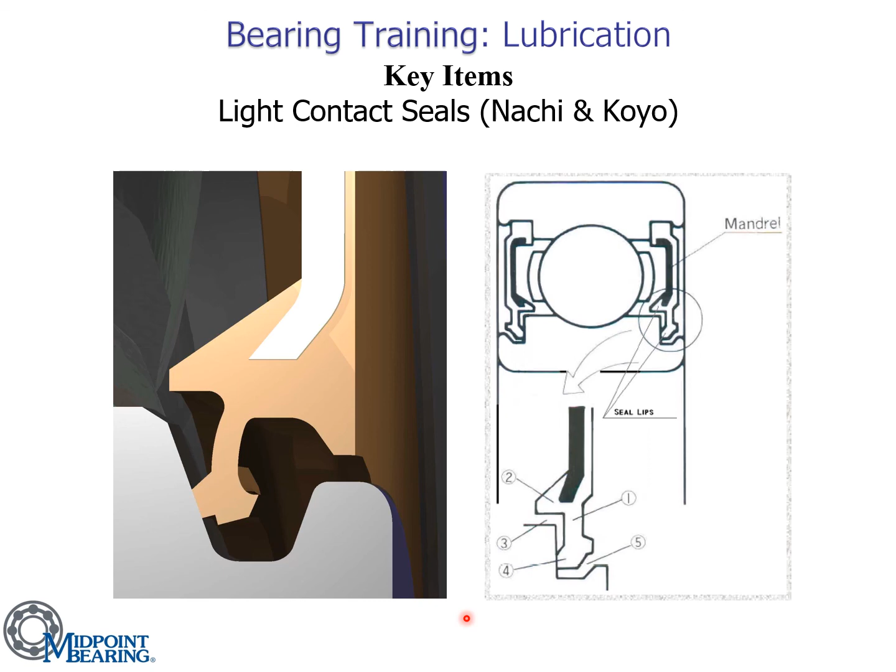Look at that, we've made it to the end. Wrap up and contact information.